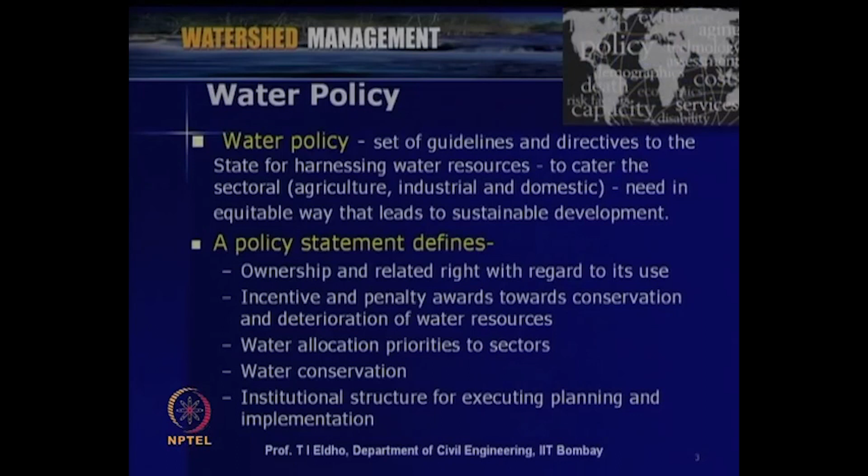Also the policy statement should mention the institutional structure for executing the planning, implementation and maintenance of the system. So, the water policy should be well defined; it should give the various aspects and various regulations which are prevailing or which are supposed to be implemented as far as that resource is concerned.

Then what are the various components of water policy? Here in these slides the components are listed. Mainly, as far as water policy is concerned, two components are there. The first one is the legislative framework, the second one is the institutional framework. The legislative framework gives the legal framework that defines the rights to exploit or use water resources and provisions for award of incentives and penalties.

So the legislative framework gives the legal aspects, the rules and regulations as far as the policy is concerned, whether a water policy or watershed policy or whichever policy we are considering. The legislative framework gives the various rules and regulations and how to implement those rules and regulations. All these aspects are given as far as the legislative framework is concerned.

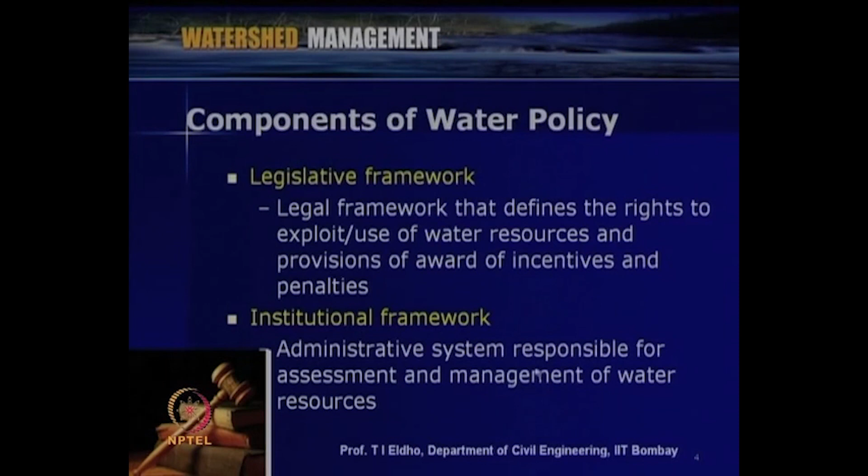Then the second framework is the institutional framework. The institutional framework gives the details of the administrative system that is responsible for assessment and management of water resources. As far as water policy is concerned, the institutional framework shows the administrative system which administers various aspects of the water resource at the national level, state level, block level or up to the panchayat level.

Now we will discuss the important aspects as far as the legislative and the institutional framework are concerned. Here the various issues related to the legislative framework are discussed in these slides. As far as India is concerned, in the Indian constitution water is entry 56 of the union list and entry 17 of the state list. Articles 246 and 262 mention water related issues, and empower parliament to make law regarding development and management of interstate rivers.

So, as far as India is concerned, water is mainly a state issue. The central government, or Government of India, has advisory roles, but of course parliament can enact various rules and regulations which the various states have to follow. As for article 262, this article specifies that parliament may by law provide that neither the Supreme Court nor any other court shall exercise jurisdiction with respect to interstate river disputes.

So you can see that as far as India is concerned, there are a number of states, and a large number of rivers are passing through various states. Then of course, various disputes will be there between states as far as the water sharing issues for a particular river are concerned.

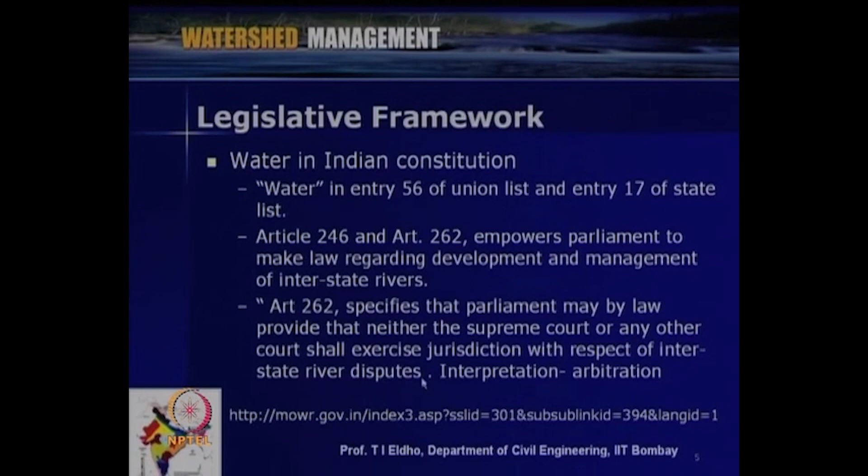Now we will discuss various water legislations as far as India is concerned. In India, as far as water legislation is concerned, surface water and groundwater are not defined separately. It is mentioned as water only. So, various components of water regulations are listed here, and their applicable regulatory framework is also mentioned.

As far as ownership of water is concerned, as per the Government of India Act of 1882, ownership of the water is with the state governments, and of course, the Government of India has an advisory role. And withdrawal of water is a state subject. Some of the states have enacted and implemented water resource legislation. And as far as usage of water is concerned, as per Government of India Acts for prevention and control of pollution, various acts have been enacted.

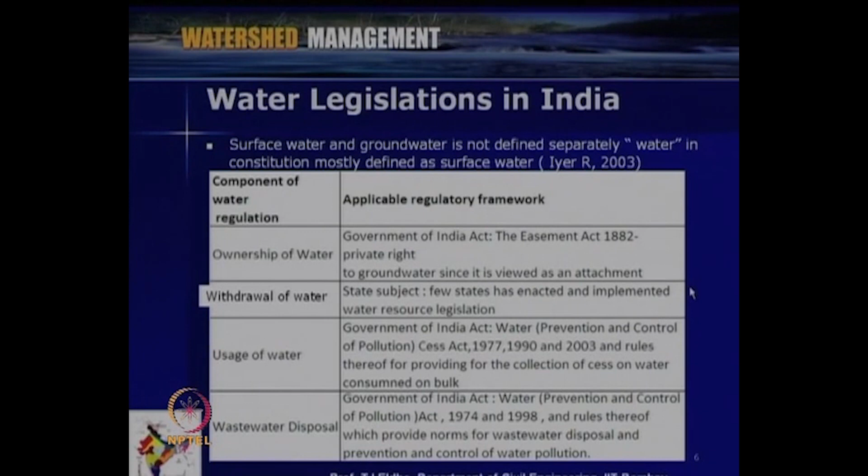As far as the various Government of India agencies are concerned, again advisory roles are there, and mainly the state government will be dealing with water pollution issues. Then for wastewater disposal also, Government of India Acts implemented in 1974 and 1998 state various regulations, and the state pollution control boards deal with wastewater related issues, water management, and water quality issues. Mainly the state has a major say, and the Government of India has advisory roles, and its agencies can give advice. Of course, important laws can be enacted by the parliament.

Some of the important water legislations in India are listed here. Some legislations relate to the Prevention and Control of Pollution Act 1974, which was amended in 1978 and 1988. These legislations deal with setting up institutions related to administration of water, like the Central Pollution Control Board and State Pollution Control Boards. They undertake functions related to prevention and control, and maintaining and restoring the wholesomeness of water. So, water is considered as a whole issue. It is not only quantity of water; quality of water is also a major issue.

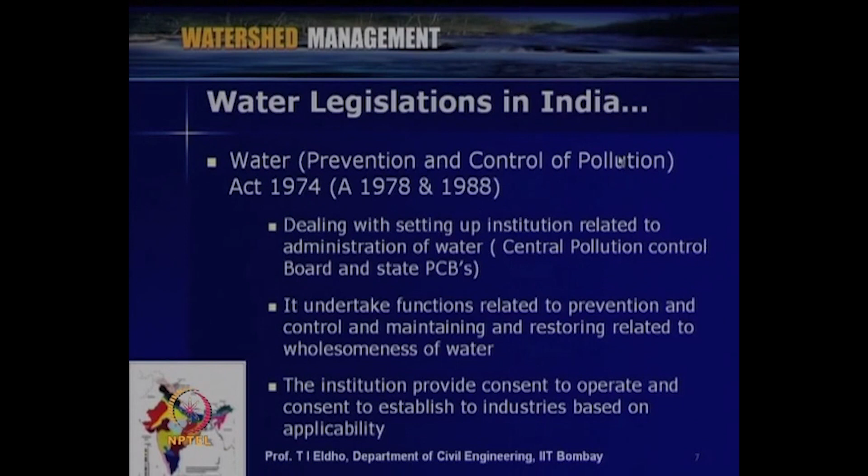So, various legislations related to water sharing or water resources utilization, and of course the quality of water to be maintained, are available in India, and the institutions also provide consent to operate and consent to establish to industries based on applicability. This is also a state issue, but of course, the Government of India enacts certain laws and regulations so that the states can follow them as appropriate.

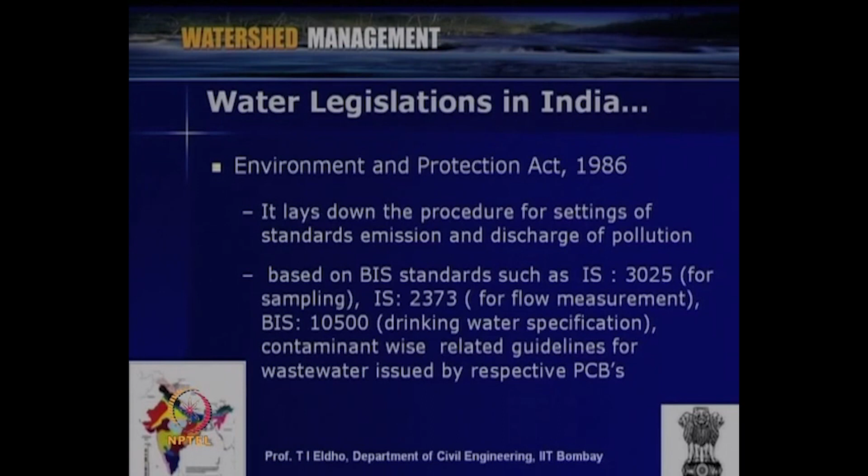Then the Environment Protection Act of 1986 gives various regulations as far as environmental issues are concerned. This Act lays down the procedure for setting up standards for emissions and discharge of pollutants, and accordingly the Bureau of Indian Standards has come up with various Indian standards such as IS 3025 for sampling, 2373 for flow measurements, 10500 for drinking water specifications, and contaminant-wise guidelines for wastewater, etc. To deal with all these issues, the Central Pollution Control Board is there, and various State Pollution Control Boards are there to see that these rules and regulations are implemented appropriately.

Then as far as water is concerned, another important bill is the Model Groundwater Bill of 1970. This bill contains the broad framework of groundwater regulation of the country. Due to overdraft of groundwater, groundwater levels are going down in many places, and groundwater pollution is also a major issue. So, this 1970 bill provides for the states and union territories to establish a groundwater authority to notify areas of control and regulate groundwater development and management.

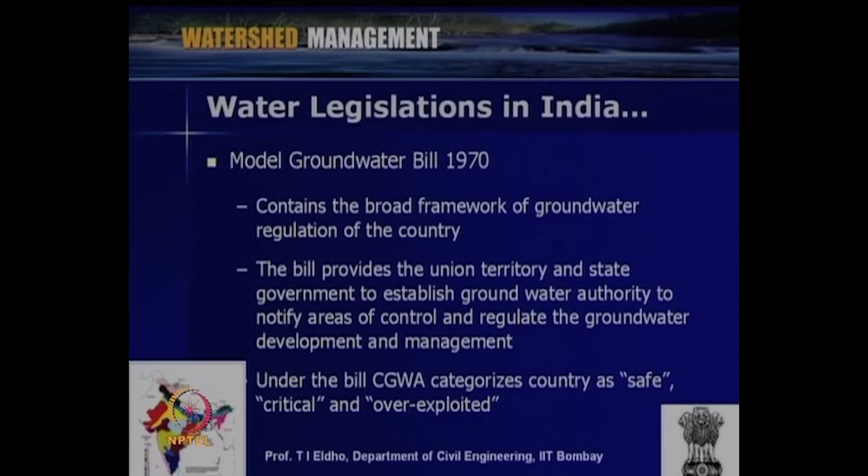So, accordingly, Government of India formed a Central Groundwater Authority. According to their norms, they have categorized the various zones as safe drinking water zones, overexploited zones or critical polluted zones. So, like that, the Central Groundwater Authority has made various norms as far as groundwater is concerned. So, that is about the groundwater bill of 1970.

Then this is about the legislative framework as far as the water policy is concerned. Of course, when we deal with watershed management, water policy is very important. According to these water policies, we will be dealing with the water resources management in a particular watershed. That is why these water policies are also important as far as watershed management issues are concerned. So far what we discussed is some of the legislation as far as water policy is concerned.

Now, the various administrative structures as far as Government of India and state governments are concerned. As far as the major institutions or administrative structure is concerned, Government of India has a Ministry of Water Resources, and many state governments also have a Ministry of Water Resources. The Government of India Ministry of Water Resources is the nodal agency for planning, development and management of the water resources of the country.

Of course, as I mentioned earlier, the state governments have a major say as far as water resources are concerned, but Government of India has an advisory role. The ministry and its agencies can advise the state governments as far as developmental issues, implementation issues, or sustainable development and sustainable water management are concerned. They have an advisory role.

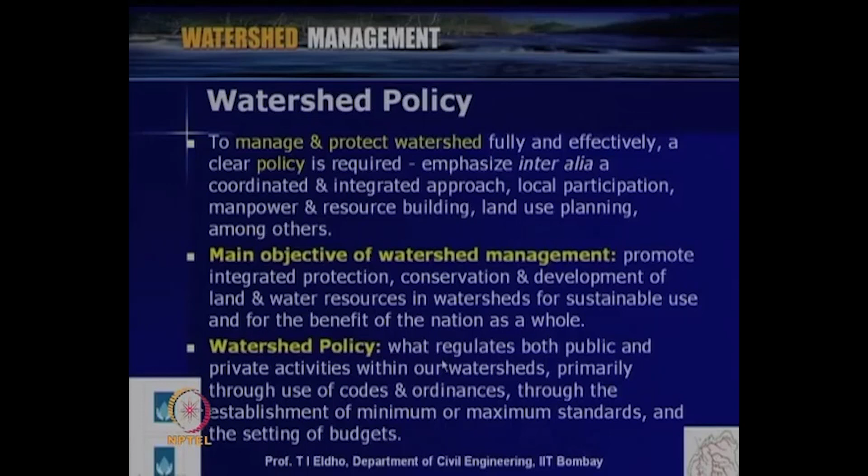So, watershed policies are the documents that give the regulations that regulate both public and private activities within our watersheds, primarily through use of codes, ordinances, the establishment of minimum or maximum standards, and setting of budgets. The watershed policy is formulated either under the Ministry of Agriculture or the Ministry of Water Resources, and then further modified as per the various needs.

So, that policy paper gives the details as far as the setting of budgets, and what kind of activities should be put, for example, when we consider various 5-year plans. Say, for the 12th 5-year plan, what are our targets for achievements in the next 5 years related to watershed, what things are to be implemented, and what kind of support should be given to various states and other agencies from the Government of India. All these details will be put in the watershed policies.

And the watershed policy also secures budgetary support for implementation of the policy. Once a policy document is made, the budget will be allocated, and the implementation issues will also be discussed. So, accordingly we can develop a watershed policy, which gives the framework as far as the watershed management plans are concerned. Here the watershed development policy issues are listed further.

So, the regulations or policies generated towards one aspect of watershed management should not be contradictory to the other aspect. As I mentioned, various ministries and agencies are dealing with water related or watershed related issues. So, the regulations or policies generated by one agency or ministry should not be contradictory to whatever is put by other agencies. So that way we should be careful.

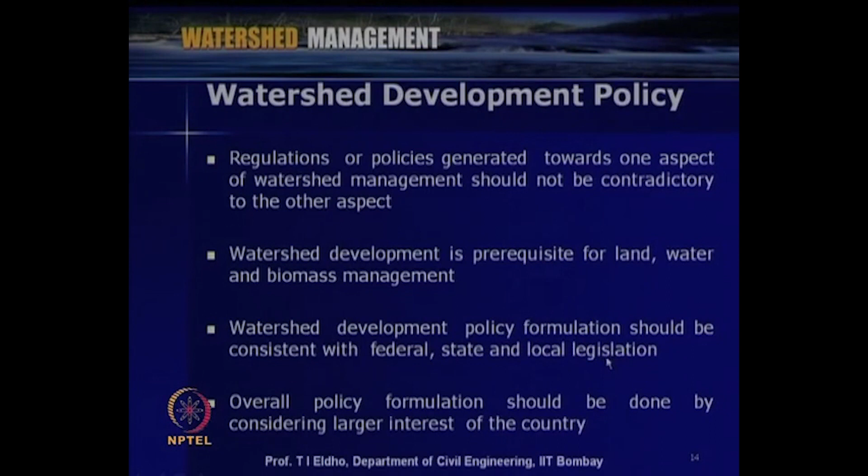Then watershed development is a prerequisite for land, water and biomass management. So, when we develop a watershed development policy, we have to see that watershed development is the prerequisite for land, water and biomass management. Then watershed development policy formulation should be consistent with federal, state and local legislation. So, the federal government, or the Government of India, for example, will have its norms and policy.

So, when the watershed development policy is formulated, we have to see the various needs, various geographical conditions, various existing policies at local, state and regional level, so that there will not be any conflicts and some mutual cooperation will be possible. Then further, overall policy formulation should be done by considering the larger interest of the country.

So, even though various issues will be there at regional level or state level, whenever final policy formulation is done, the main emphasis should be that overall policy formulation should be for the larger interest of the country. So, we should be careful when the appropriate watershed policies are formulated.

Now, let us see some of the important characteristics of watershed policies. They should stand as ready guides to answering many questions that may arise in the implementation of watershed management plans. So, when we are developing a watershed management plan and then going for implementation, the policy document should clearly tell the various questions, various issues as far as the implementation agencies are concerned.

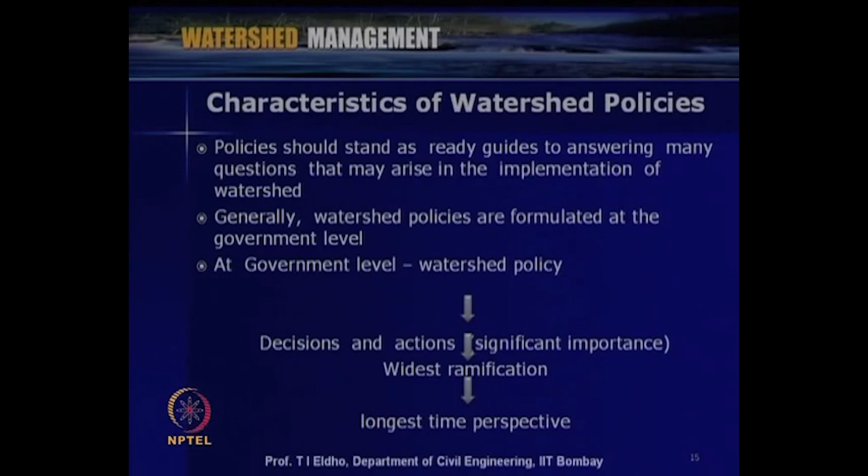And then the time frame: whenever this policy is implemented, what will happen for that particular policy and what will be its ramifications. So, that also we have to discuss whenever we formulate a watershed policy, along with the various issues concerned with that particular watershed policy. Now, the various issues when we formulate watershed policies are discussed here. Watershed policy formulation is very data intensive.

As I mentioned, when we prepare watershed management plans, it depends upon various issues like the particular watershed characteristics, the various needs of the society or of the particular area, and the climatic or hydrological issues. So, when we are formulating a particular watershed policy, we have to see that all these issues are addressed properly.

Of course, from one location to another, the various characteristics and issues will vary, but to come up with a watershed policy, we can classify the various issues according to the needs and characteristics, collect the appropriate data, analyze it, and then go for the formulation of the watershed policy.

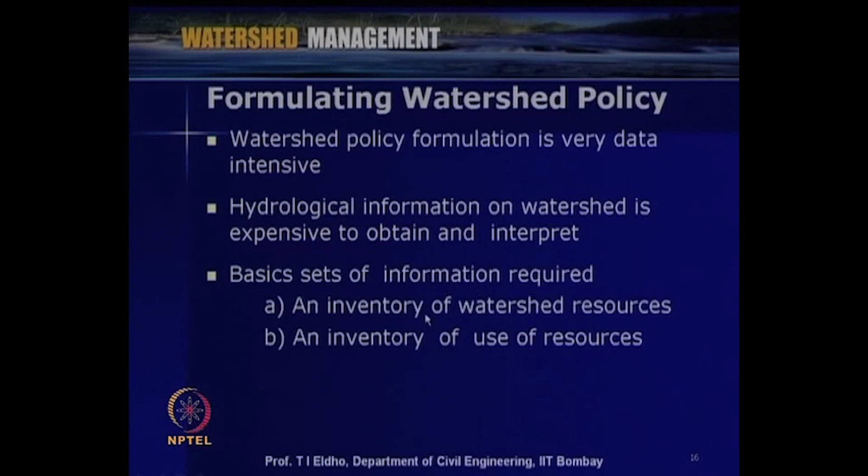The data like hydrological information of the watershed we have to get, and that is very expensive to obtain and interpret, and then some of the basic sets of data like inventory of watershed resources, inventory of use of resources, and the socio-economics of the people. So, like that, various issues we have to deal with when we formulate the watershed policy.

As far as various data is concerned, for the collection of information we can follow the various aspects listed here, like right of access to information, so this should be readily available. Mainly, as we discussed, most of these implementation aspects or issues are a state subject. So, the state government can make policies or formulate the objectives and then collect the appropriate data.

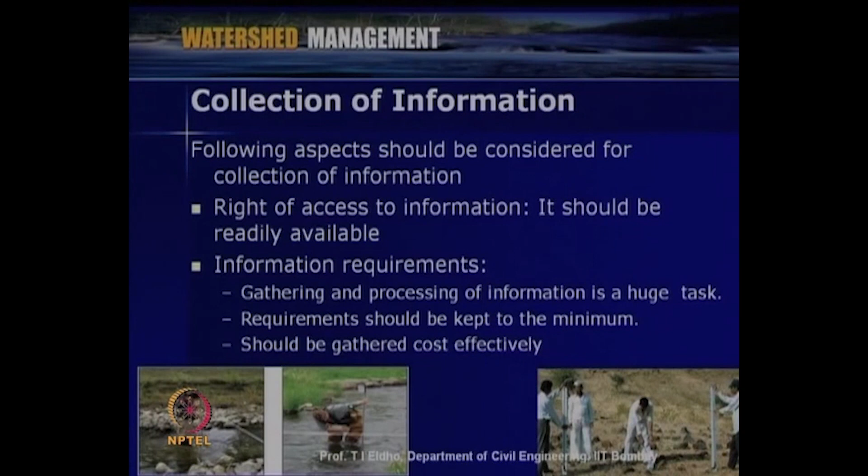Then various information requirements such as the hydrological details, the land details or the water related details need a large amount of time, and it is a huge task. Since the watershed characteristics or watershed plans will vary depending upon the area, we have to see that the data requirements are minimum, and collect the data in an optimal way, so that we can go for the best policy documentation for the particular watershed management issues.

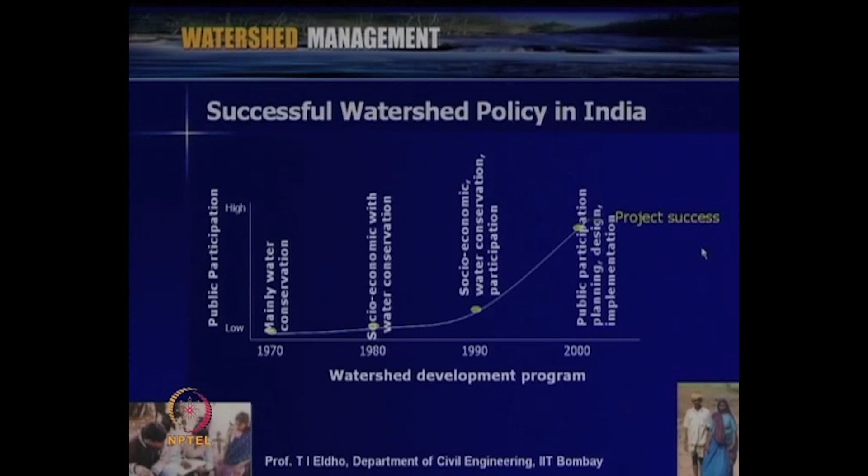So you can see that once many of the recent projects implemented by various agencies were evaluated, many of these projects are successful. Mainly the reason is people's participation; people were actively involved from the planning stage to the implementation, design, and of course its maintenance.

So now with this perspective, we will come back to the water policies in India. Some of the needs of a national water policy in India are listed here. Availability of water is highly uneven in both space and time. In India, water is mainly obtained through monsoon rainfall, starting from June to either September or October.

So the precipitation is confined to only a few months in a year, and rainfall varies spatially. For example, in western parts of Rajasthan the rainfall is about 100 mm, but this goes to 10,000 mm in some parts of the Meghalaya region. And there are a number of problems like floods and droughts. Floods affect around 7.5 million hectares per year in India.

Planning and implementation of water resource projects involve a number of socio-economic aspects and issues. Then there is the need for environmental sustainability, and rehabilitation of project affected people and livestock. Whenever huge projects are coming up, environmental issues and rehabilitation of the people are major issues to be considered. Common approaches and guidelines are necessary on these matters.

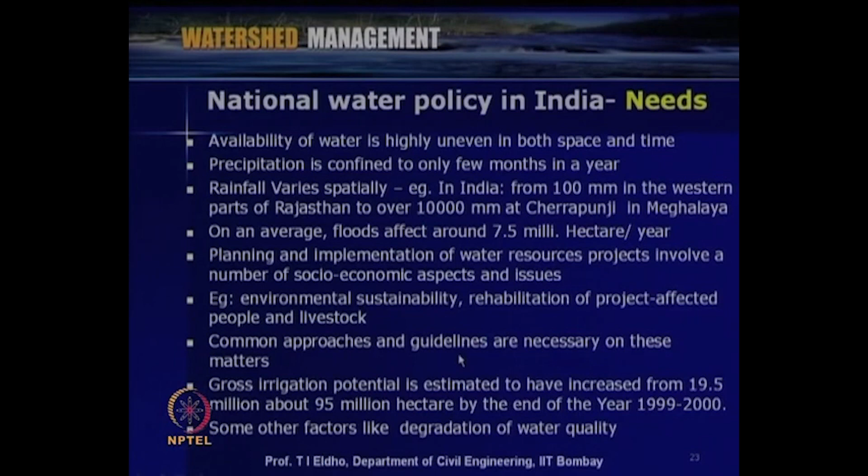Then gross irrigation potential is estimated to have increased from 19.5 million to 95 million hectares by the year 1999 or 2000. So whenever a national water policy is formulated, we have to see the water quality issues also. Accordingly, a national water policy has been formulated in India. This policy was first adopted in 1987 and then formulated in 2002.

This national water policy advocates that the water resources of the country should be brought within the category of utilizable resource to the maximum possible extent. There are various sectoral needs like the agriculture sector, industrial sector or domestic sector; all these need to be considered to the maximum possible extent. Those were some of the important aspects of the national water policy.

Then some of the salient features are listed here. This national water policy promotes use of non-conventional methods such as traditional water harvesting, rooftop rainwater harvesting, etc. This water harvesting will mainly be done on a watershed scale. Then water transfer to water scarce regions, like interbasin transfer from one basin to another, was also formulated in the national water policy of 2002.

Then people participation has been given very much importance in the water policy. And also public private partnership, PPP, was given emphasis in this water policy of 2002.

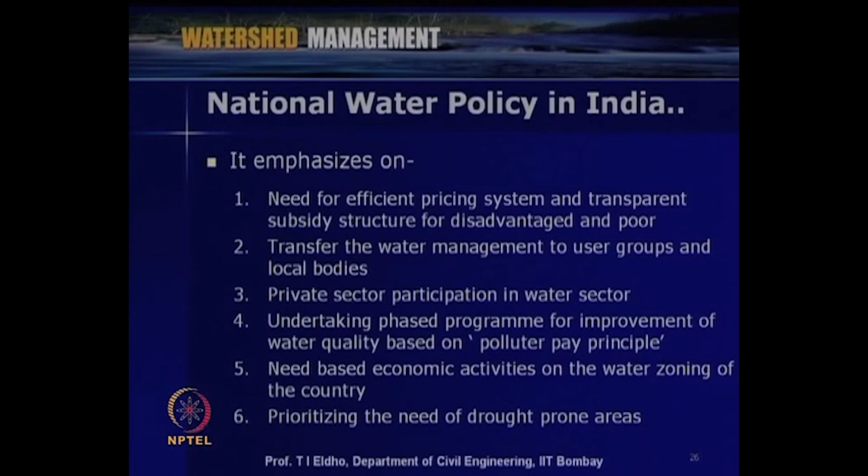Then prioritizing the needs of drought-prone areas. As per the climatic conditions, the drought-prone areas were categorized, and priority should be given to the drought-prone areas. So these are some of the salient features of the national water policy of the Government of India. Like this, depending upon the various needs and issues, we can develop a particular water policy or watershed policy. The water policy gives further guidelines for watershed development plans or watershed development policies.

Before closing this lecture, let us have a brief look into two case studies. The first case study is some of the regulations and policies as far as watershed management in the USA is concerned. In the USA, the water regulations emphasize the Clean Water Act of the federal government, evolving from the Federal Water Pollution Control Act, which was amended in 1977 and further revised in various years, like 1981 to 87. The objective is to restore and maintain the chemical, physical and biological integrity of the nation's waters.

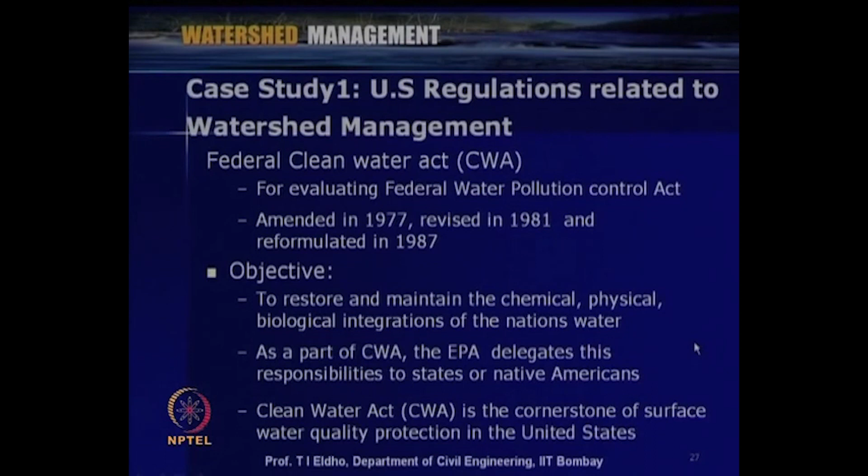As a part of the Clean Water Act, the Environmental Protection Agency delegates these responsibilities to states. The Clean Water Act is the cornerstone of surface water quality protection in the United States, and it is followed by various states also. Some of the salient features of this regulation include the involvement of stakeholder groups in the development and implementation of the strategies. Achieving and maintaining state water quality is another hallmark of this approach.

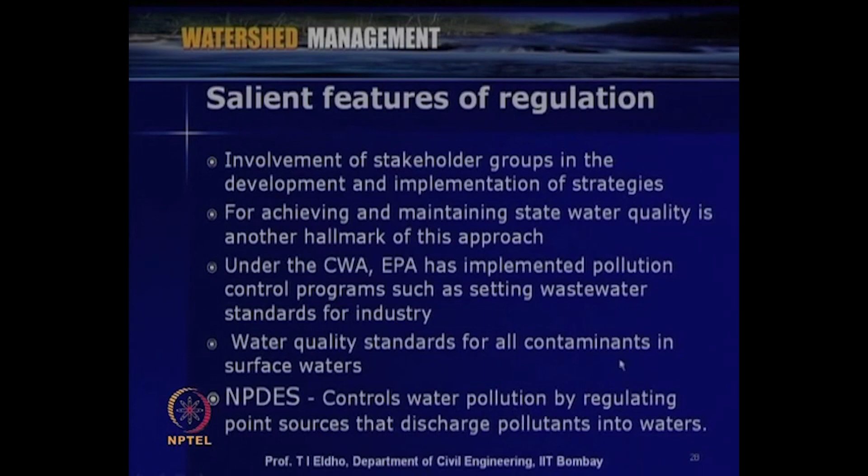Under the CWA, the Environmental Protection Agency has implemented pollution control programs such as setting wastewater standards for industry and local domestic sewage plants. Water quality standards for all contaminants, including surface water and groundwater, are listed. The National Pollutant Discharge Elimination System has been implemented under this Clean Water Act. The NPDES controls water pollution by regulating point sources that discharge pollutants into the waters.

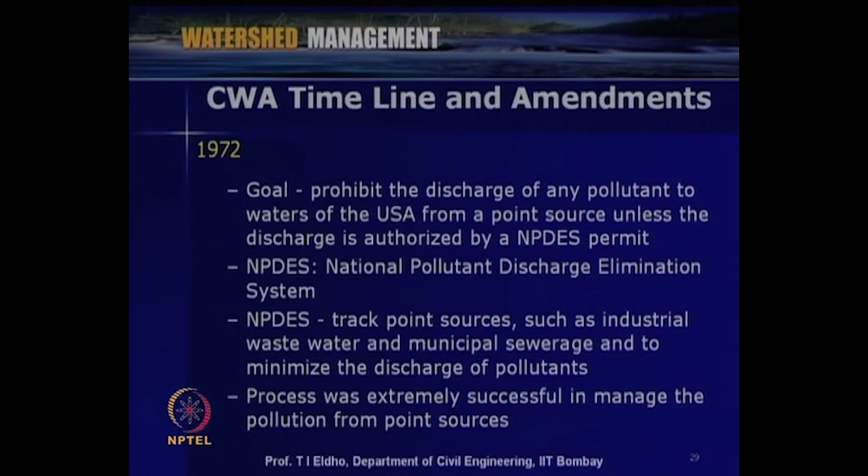Here various timelines and amendments are listed for various years. In 1972, the goal was to prohibit the discharge of any pollutant to the waters at various locations, and the National Pollutant Discharge Elimination System was developed. The process was extremely successful in various areas, and the implementation and maintenance were looked after by the US EPA. In 1987, modifications or amendments were made concerning non-point sources of pollution.

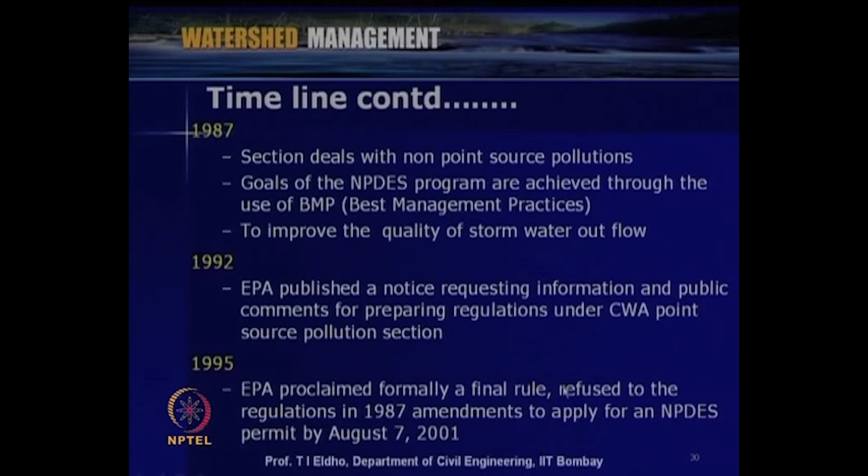In 1992, the Environmental Protection Agency published a notice requesting information and public comments for preparing regulations under the Clean Water Act. In 1995, EPA formally proclaimed a final rule. Under the NPDES various amendments were made so that the implementations were made strict. Further, in 1996, the National Water Quality Inventory was implemented, and in 1998, the EPA National Water Quality Inventory report was formulated.

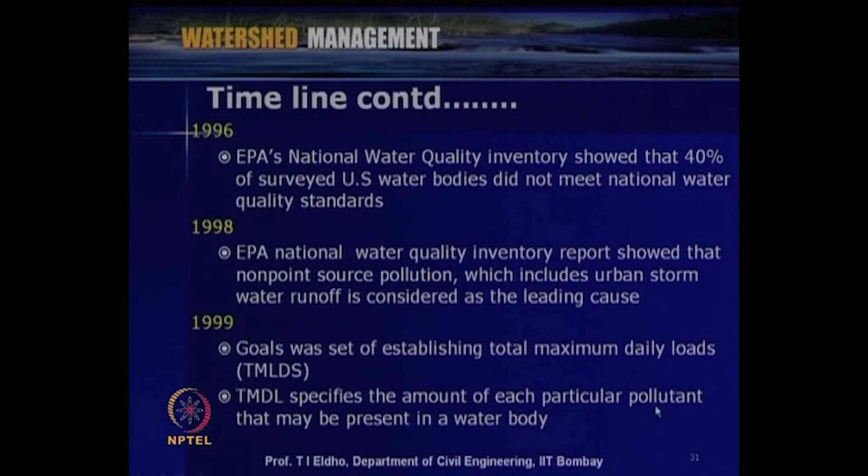Then in 1999, the goal was setting or establishing total maximum daily loads as far as TMDLs are concerned. So, this TMDL specifies the amount of each particular pollutant that may be present in a water body. So, like that, the Clean Water Act proposed in the USA and then implemented by

US EPA has been very successful in preventing water pollution at various locations, and this water pollution prevention policy has been implemented by various states effectively, and whenever the evaluations were done in the last few years, you can see that these policies were very successful.

Then as a second case, another case is about the river interlinking project of the Government of India, which was proposed in 2003 and 4, and the rationale was the large spatial and temporal distribution of rainfall patterns causing drought and flood-like conditions in India. So this gives birth to the policy concept of the river interlinking project. That means connecting the surplus water areas to other scarce areas through interlinking of various river basins. So various river basins are listed here.

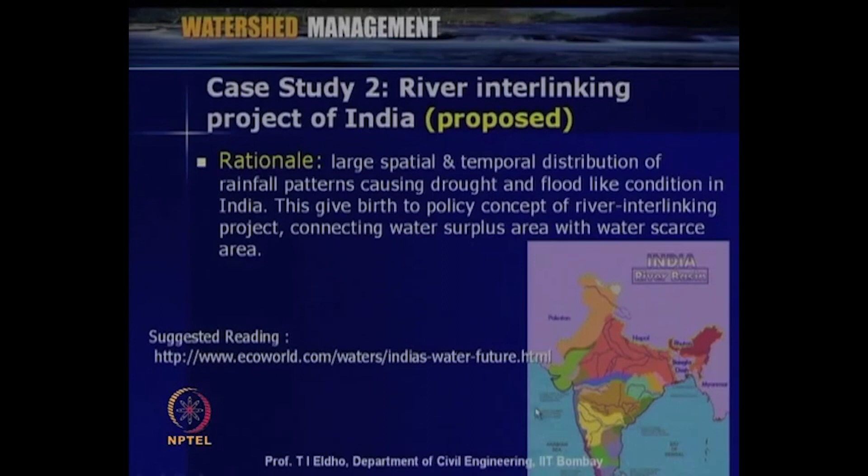But you can see that such a policy has a lot of impacts as far as the various issues are concerned. The positive impacts are that this may enhance food grain production and water availability, but then of course a lot of problems will be there, like environmental issues, displacement issues of the people, and sustainability issues.

So the positive impacts and negative impacts, all these details have been studied by the National Water Development Agency for the last few years, and recently for one or two links like the Ken-Betwa link, the implementation process is going on, but as far as the remaining links are concerned, studies are still going on.

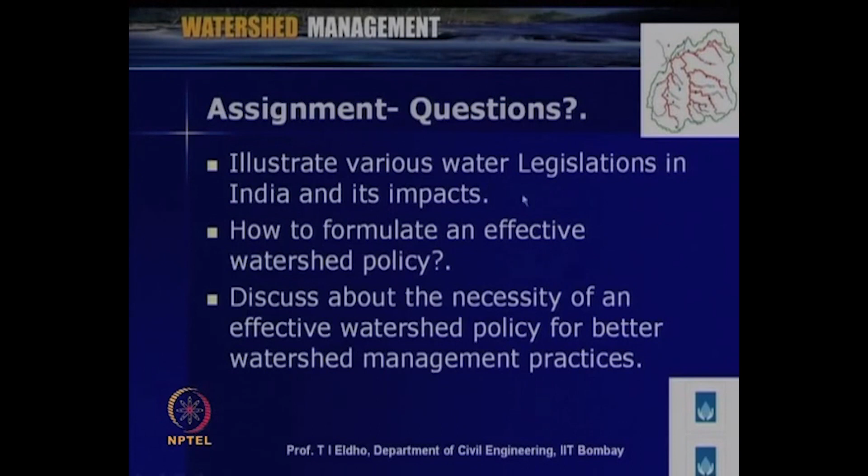Then a few assignment questions: illustrate various water legislations in India and their impacts, how to formulate an effective watershed policy, and discuss the necessity of an effective watershed policy for better watershed management practices. You can make these issues an assignment. A few questions are listed here, but many of these issues we have discussed in today's lecture.

As an unsolved problem, you may develop a case study of the watershed policy of a country by considering physical setting, watershed conditions, the various problems, history of watershed management, international trends, legislative framework, institutional framework, challenges, strategies for policy implementation, financial aspects, implementation issues, etc. Various case studies are available on the internet. For example, you can see a case study for Jamaica on this website. So you can develop a case study by considering various issues.

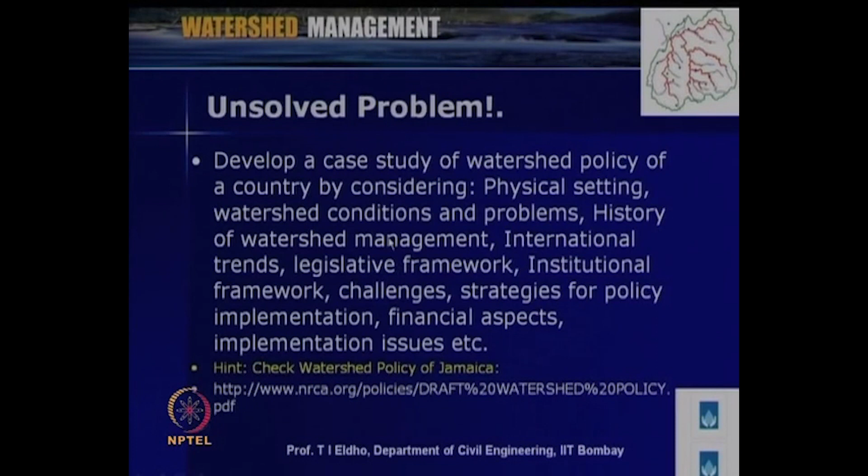So today we have discussed watershed development policy and its formulation, and of course water policy is also an important issue, so various aspects of water policies are also discussed in today's lecture. With this, the first module on introduction and watershed concepts, 3 lectures, is over. You can see the various questions listed in the self-evaluation, tutorial, assignments, and unsolved problems for the 3 lectures you would have seen in the video. Now we will be going to module 2 in the next lecture.